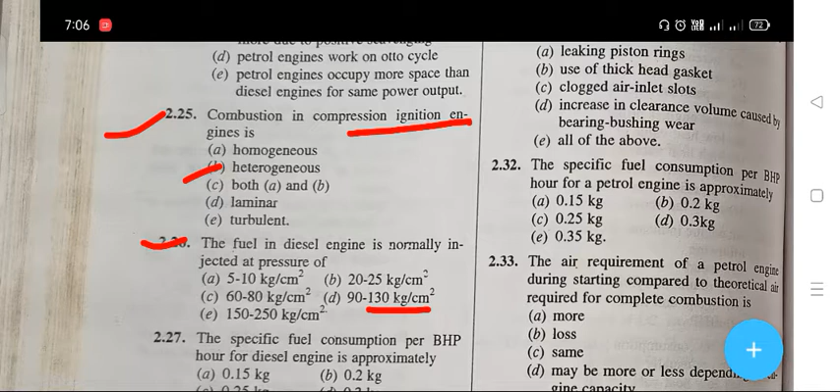Next question: the specific fuel consumption per bhp hour for diesel engine is approximately. The right answer is B, that is 0.2 kg.

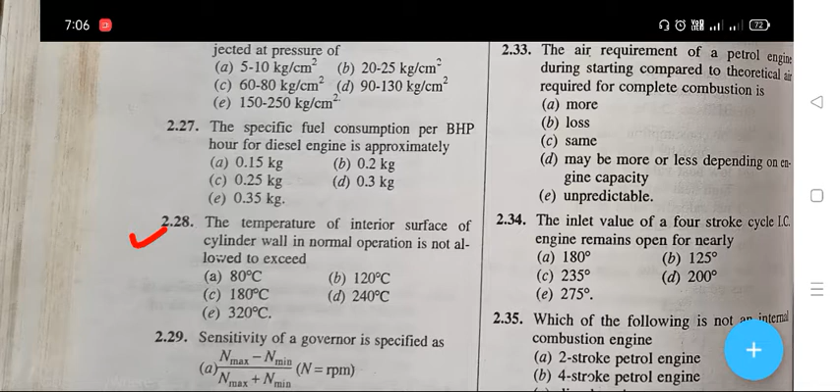Next question: the temperature of interior surface of cylinder wall in normal operation is not allowed to exceed. The right answer is C, 180 degrees Celsius.

Next question: sensitivity of a governor is specified as. The right answer is C, that is 200 into n max minus n min, upon n max plus n min.

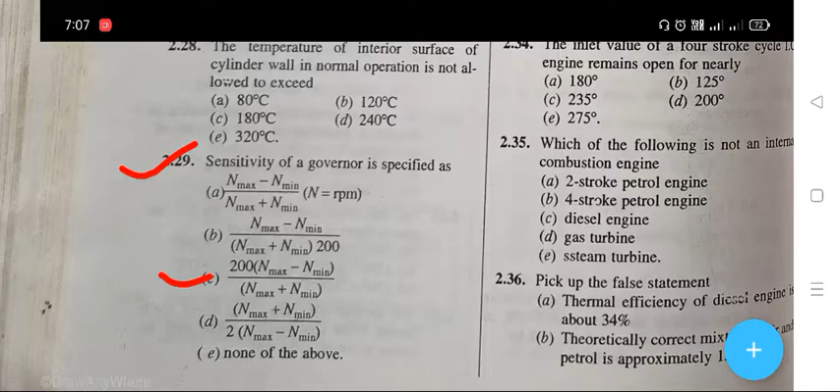Next question: crankcase explosion in IC engine usually occurs as. The right answer is the first option, a mild explosion followed by a big explosion.

Next question: compression loss in IC engine occurs due to. The right answer is E, all of the above. That means leaking piston rings, use of thick head gasket, clogged air inlet slots, and increase in clearance volume caused by bearing bushing wear.

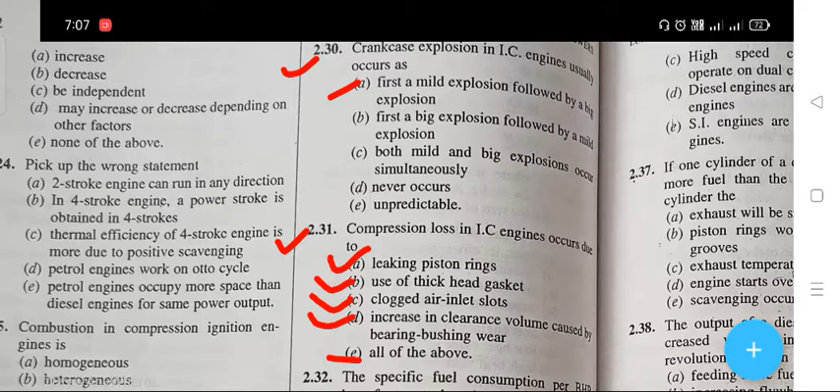The next question is that the specific fuel consumption per bhp hour for a petrol engine is approximately. The right answer is C, that is 0.25 kg.

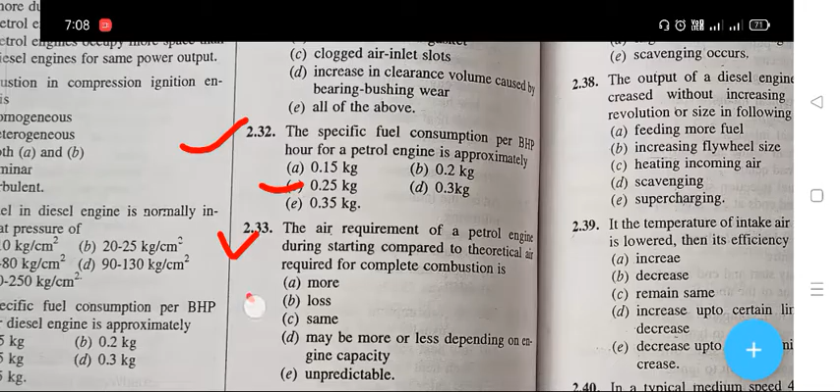The next question: the air requirement of a petrol engine during starting compared to the theoretical air required for complete combustion is. The right answer is B, that is less.

Next question: the inlet valve for a 4-stroke cycle IC engine remains open for nearly. The right answer is C, that is 235 degree.

Next question: which of the following is not an internal combustion engine? The right answer is E, that is steam turbine.

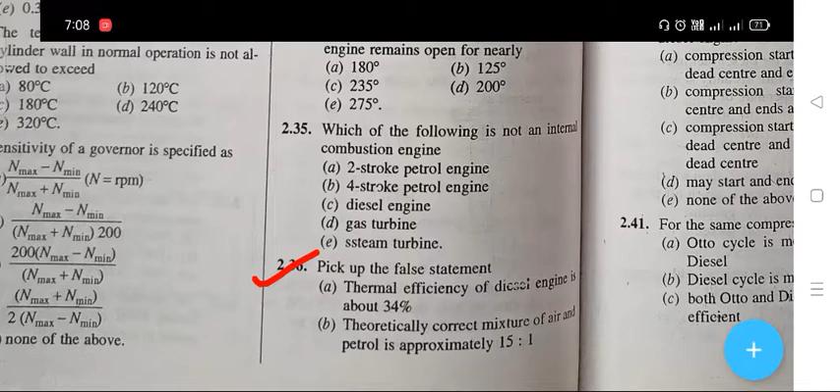The next question is, pick up the false statement. The right answer is E: SI engines are quality governed engines.

Next question: if one cylinder of a diesel engine receives more fuel than the others, then for that cylinder the right answer is E, that is scavenging occurs.

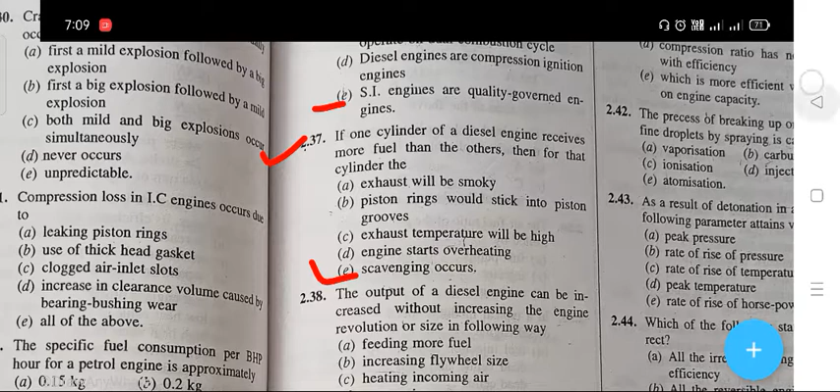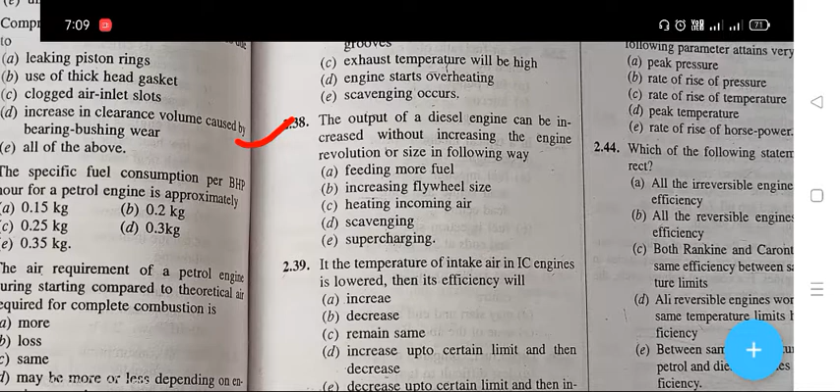Next question: the output of a diesel engine can be increased without increasing the engine revolution or size in the following way. The right answer is E, that is supercharging.

The next question is, if the temperature of intake air in IC engines is lowered, then its efficiency will be. The right answer is A, that is increase.

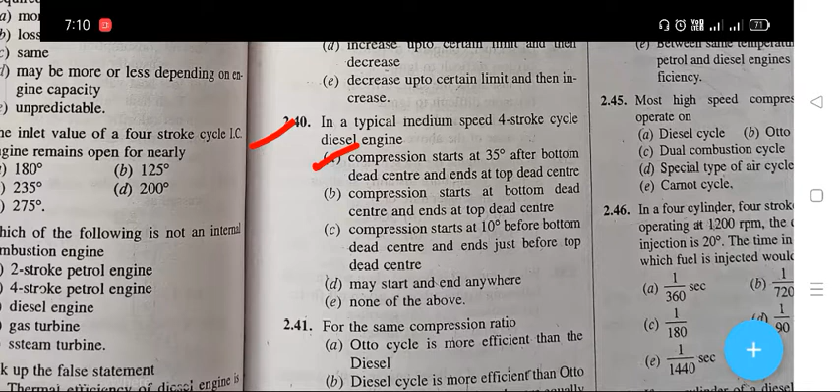Next question: in a typical medium speed 4-stroke cycle diesel engine, the right answer is A, compression starts at 35 degree after bottom dead center and ends at the top dead center.

Next question: for the same compression ratio, the right answer is A, that is the Otto cycle is more efficient than the diesel cycle.

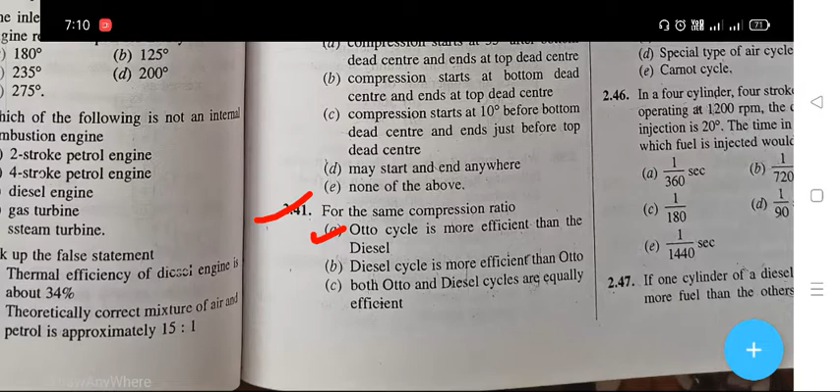The next question is that the process of breaking up a liquid into fine droplets by spraying is called. The right answer is E, that is atomization.

Next question: as a result of detonation in IC engines, the following parameter attains a very high value. The right answer is B, that is rate of rise of pressure.

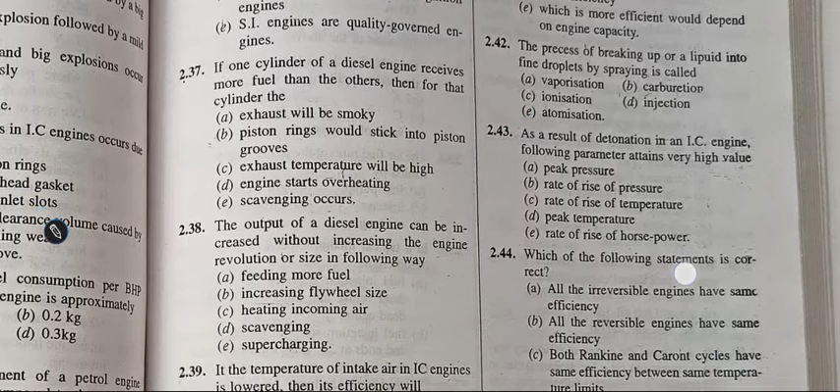Next question: which of the following statements is correct? The right answer is D: all reversible engines working between the same temperature limits have the same efficiency.

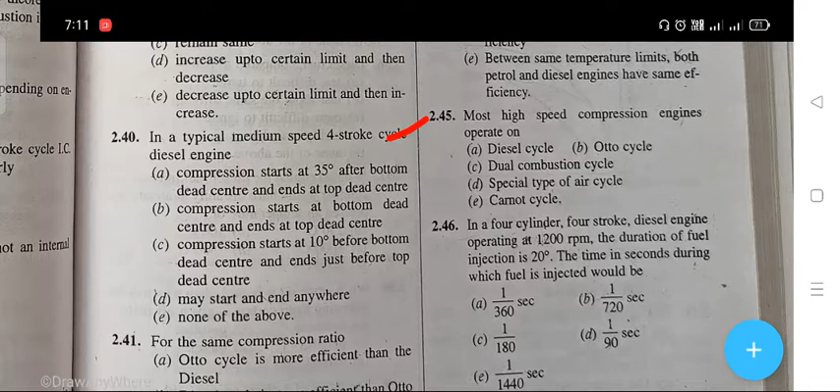Next question: most high speed compression engines operate on. The right answer is C, that is dual combustion cycle.

Next question: in a 4-cylinder 4-stroke diesel engine operating at 1200 rpm, the duration of fuel injection is 20 degree. The time in seconds during which fuel is injected would be. The right answer is A, 1/360 second.

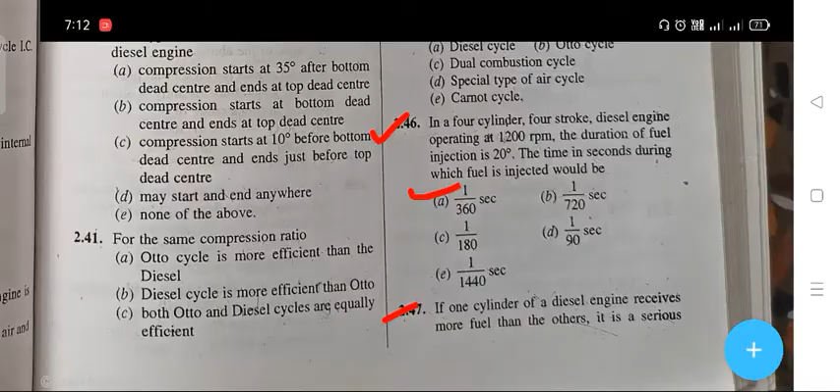Next question: if one cylinder of a diesel engine receives more fuel than the others, it is a serious condition for that cylinder which can be checked by. The right answer is D, that is checking cylinder exhaust temperature with a pyrometer.

Next question: the accumulation of carbon in a cylinder results in increase of. The right answer is D, that is effective compression ratio.

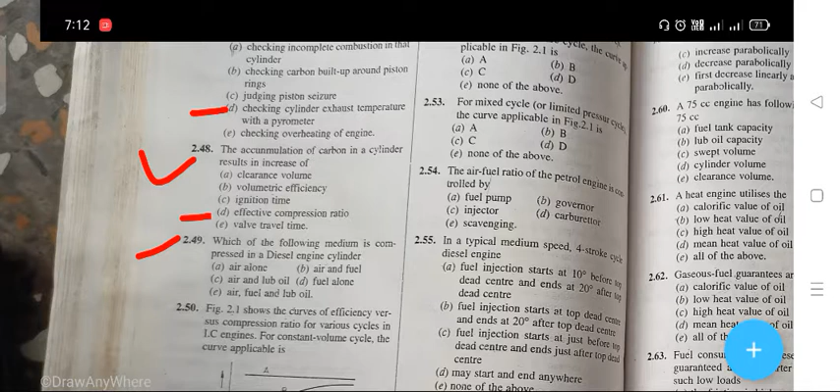Next question: which of the following medium is compressed in a diesel engine cylinder? The right answer is A, that is air alone.

The next question is, the figure shows curves A, B, C and D showing efficiency versus compression ratio of various cycles in IC engines. For the constant volume cycle, which curve is applicable? The right answer is B, that is capital B is the right answer. The curve shown is efficiency versus compression ratio for various cycles in IC engines, and for the constant volume cycle, the right answer is curve B.

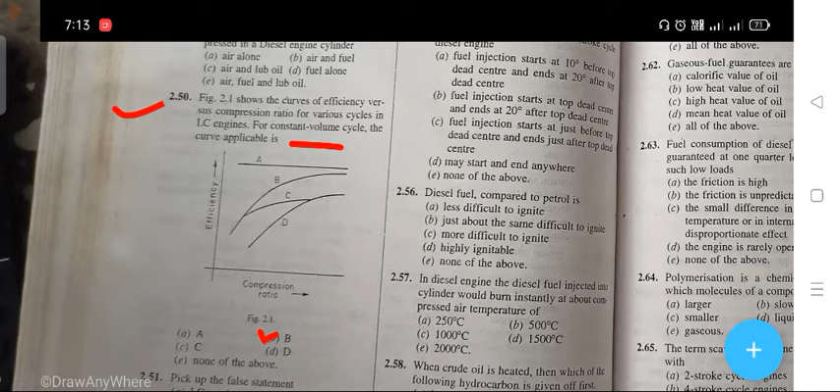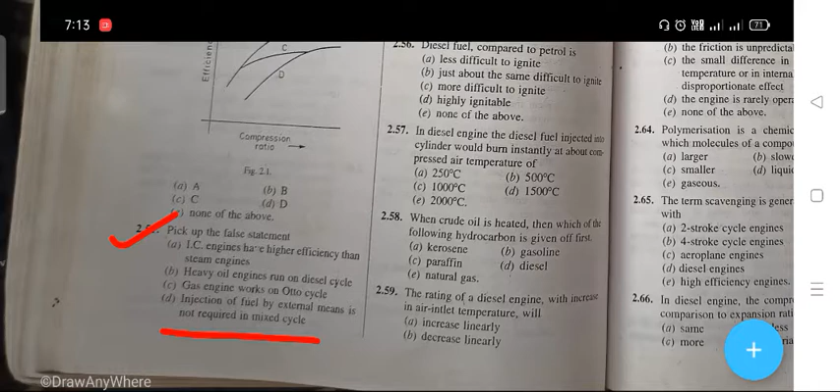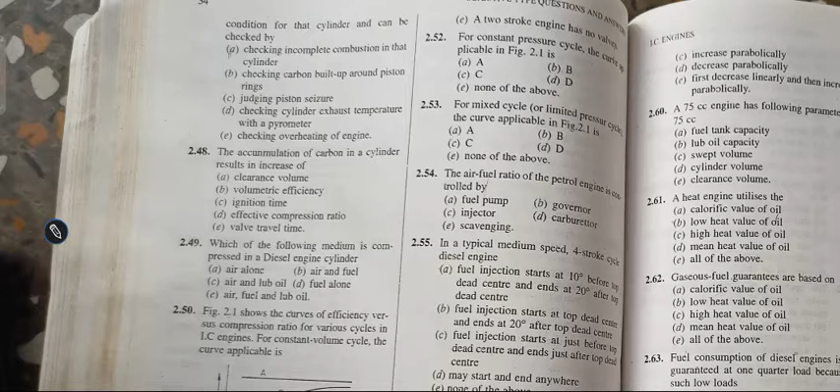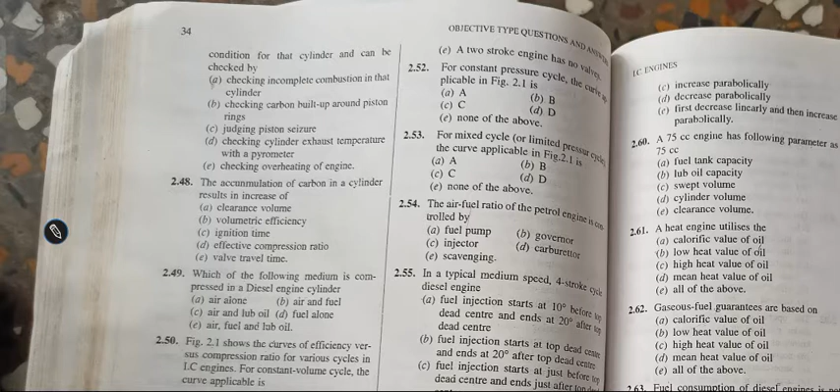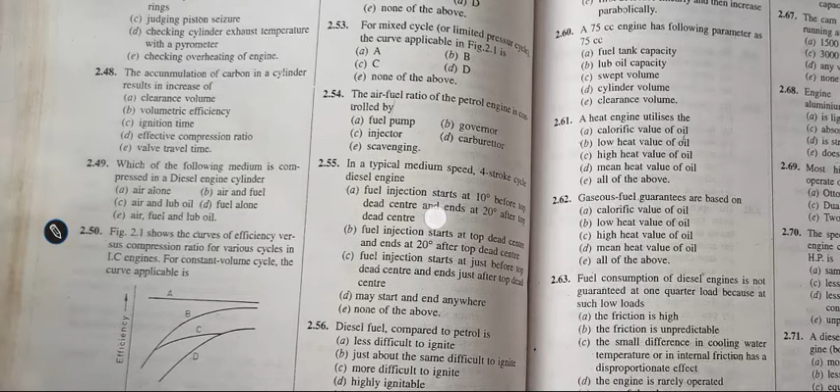Which curve is constant pressure cycle? D. Next question: for a mixed cycle, that is for limited pressure cycle, which curve is applicable? The right answer is C. So C is for mixed cycle, B is constant volume cycle, and D is constant pressure cycle as per the answers.

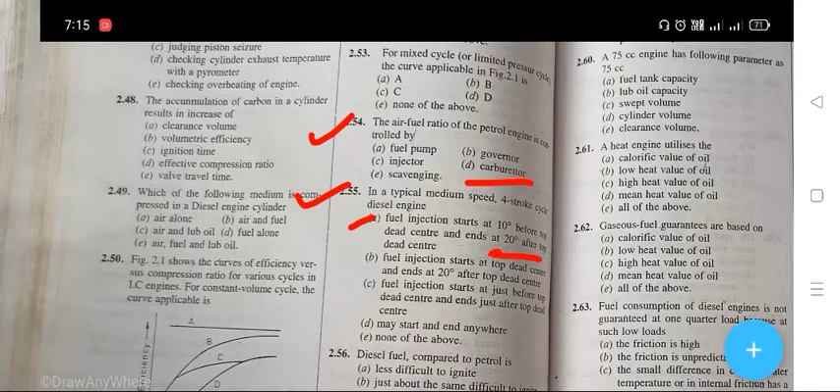Next question is, diesel fuel compared to petrol is, the right answer is C, that is more difficult to ignite.

Next question is, in a diesel engine, the diesel fuel injected into the cylinder would burn instantly at about what compressed air temperature? The right answer is C, that is 1000 degrees Celsius.

Next question, when the crude oil is heated, then which of the following hydrocarbons is given off first? The right answer is E, that is natural gas.

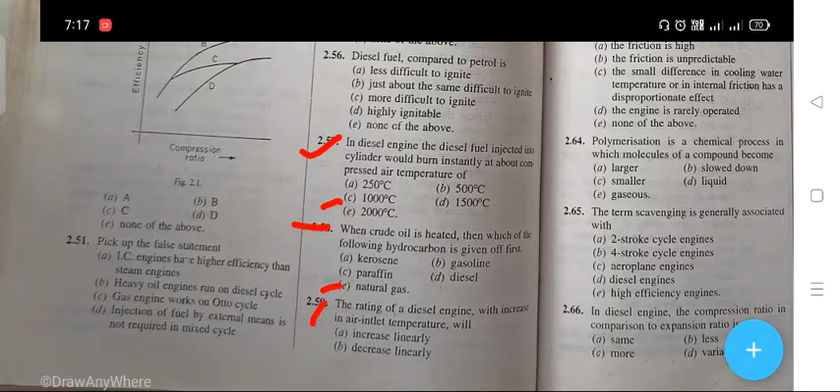Next question, the rating of a diesel engine with increase in air inlet temperature will be decrease linearly.

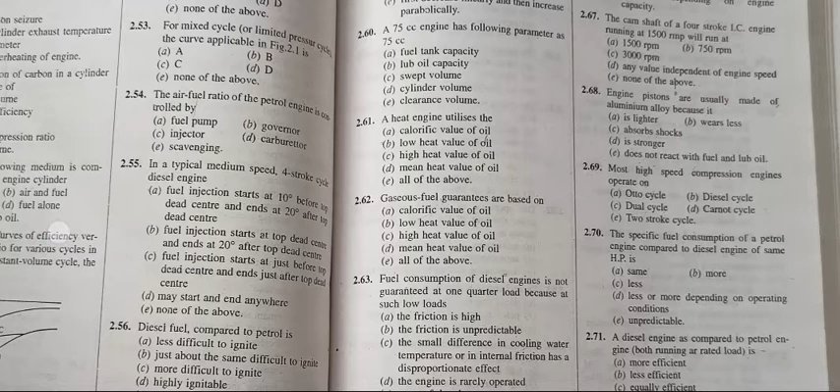Next question, a 75 cc engine has the following parameter: 75 cc, what is the right answer? It is C, that is your swept volume.

Next question, a heat engine utilizes the, right answer is C, that is high heat value of oil.

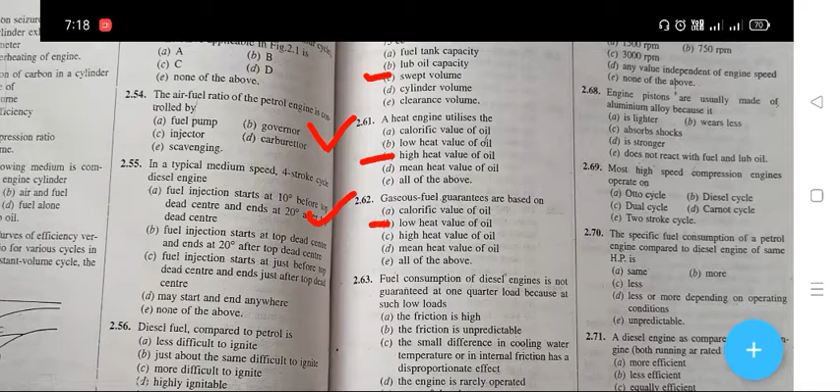Gaseous fuel guarantees are based on, the right answer is B, that is low heat value of oil.

Next question is, fuel consumption of diesel engine is not guaranteed at 1/4 load because at such low loads, the right answer is C, that is the small difference in cooling water temperature or internal friction has a disproportional effect.

Next question, polymerization is a chemical process in which molecules of a compound become A, that is larger. Polymerization is a chemical process in which molecules of a compound become larger.

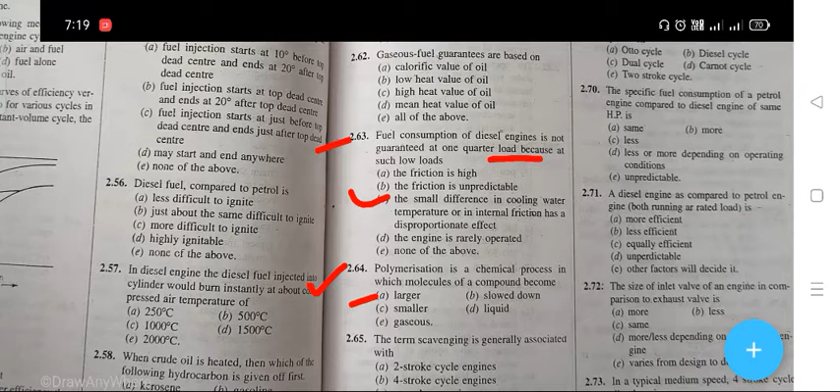Next question is, the term scavenging is generally associated with, right answer is E, high efficiency engines. And the next question is, in diesel engine the compression ratio to expansion ratio is C, more.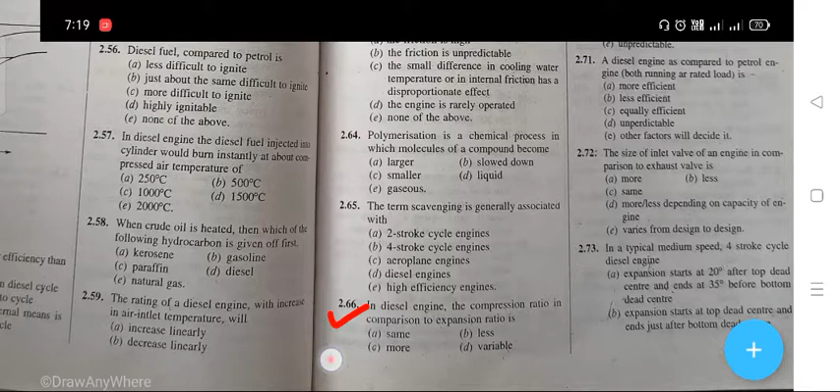The next question is, the camshaft of a 4-stroke IC engine running at 1500 rpm will run at, the right answer is B, that is 750 rpm.

Engine pistons are usually made up of aluminum alloy because it is A, lighter. Most high speed compression engines operate on, the right answer is C, that is dual cycle.

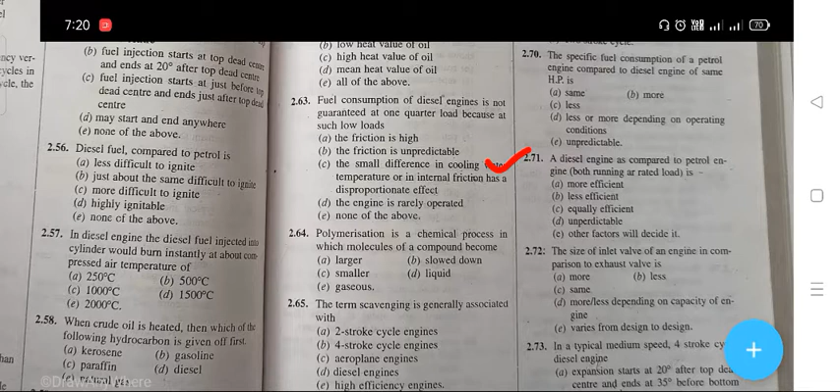The specific fuel consumption of a petrol engine compared to diesel engine of same HP is, right answer is B, more. The next question is, a diesel engine as compared to petrol engine, both running at rated load, is, right answer is A, that is more efficient.

Next question: the size of inlet valve compared to exhaust valve is B, that is less. In a typical medium speed 4-stroke cycle diesel engine, the answer is A: expansion starts at 20 degrees after top dead center and ends at 35 degrees before bottom dead center.

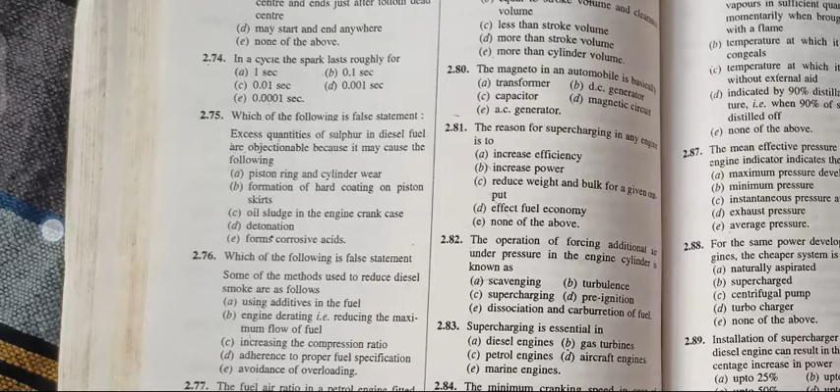Next question: in a cycle the spark lasts roughly for. The right answer is D, that is 0.001 second.

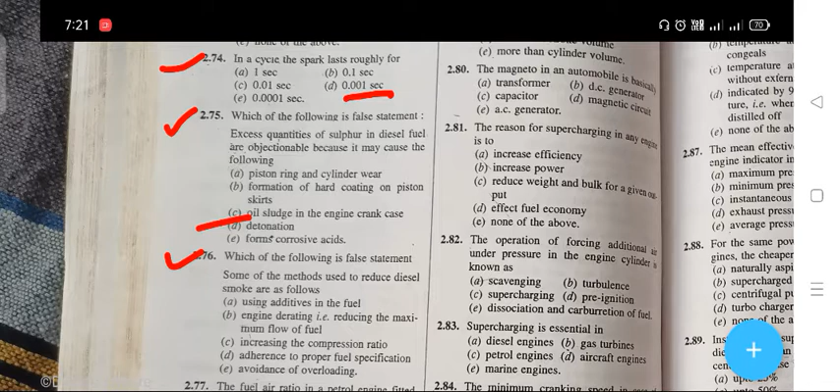Next question: which of the following is the false statement? The right answer is D, that is detonation. Next question: which of the following is the false statement? Right answer is C, that is increasing the compression ratio.

Next question: the fuel air ratio in a petrol engine fitted with a suction carburetor operating with a dirty air filter, as compared to a clean filter, will be. The right answer is A, that is higher.

Next question: pick up the wrong statement about supercharging. The right answer is D, supercharging results in fuel economy.

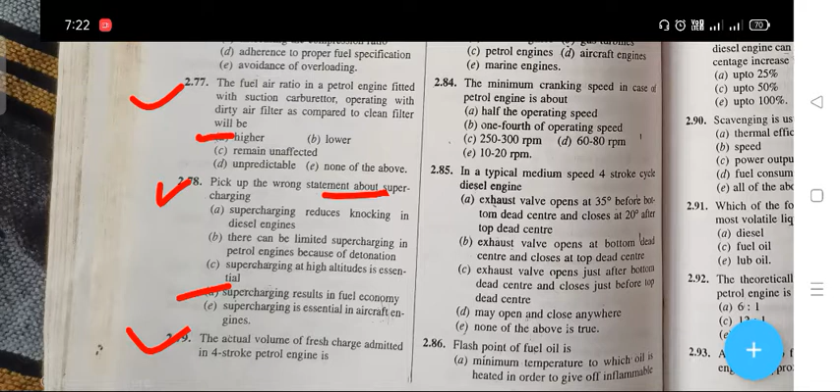Next question: the actual volume of fresh charge admitted in a 4-stroke engine is C, that is less than stroke volume. Next question: the magneto in an automobile is basically. The right answer is B, that is DC generator.

Next question: the reason for supercharging in any engine is to. The right answer is C, that is to reduce weight and bulk for a given output.

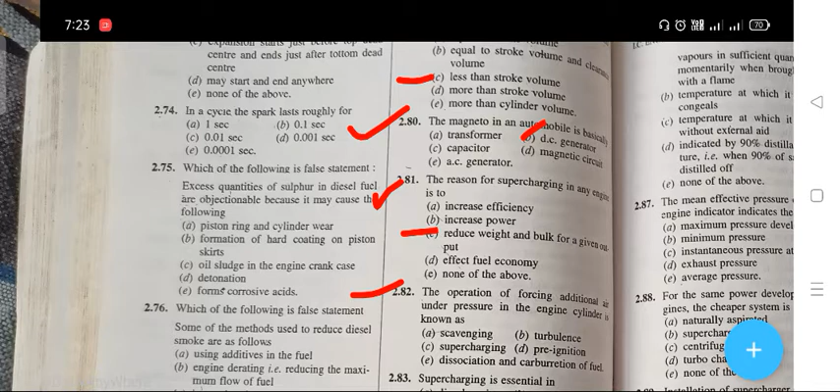Next question: the operation of forcing additional air under pressure into the engine cylinder is known as. Right answer is C, that is supercharging.

Next question: supercharging is essential in. Right answer is D, that is supercharging is essential for aircraft engines.

Next question: the minimum cranking speed in case of a petrol engine is about. Very important question. The minimum cranking speed in case of a petrol engine is 60 to 80 rpm.

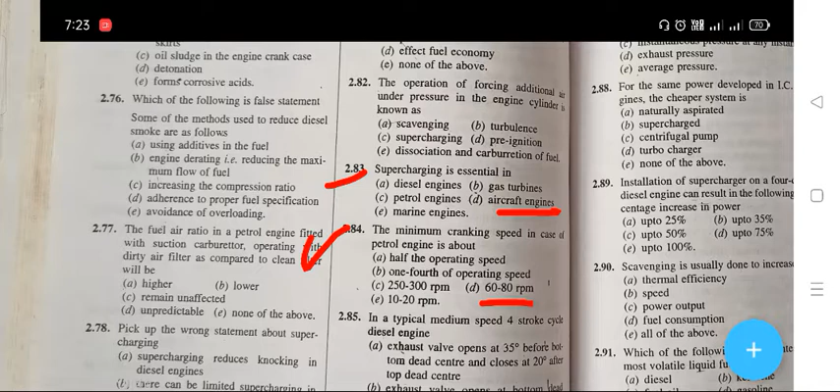Next question: in a typical medium speed 4-stroke cycle diesel engine. Right answer is A, that is the exhaust valve opens at 35 degrees before bottom dead center and closes at 20 degrees after top dead center.

Flash point of a fuel oil is. The right answer is A, that is the minimum temperature to which oil is heated in order to give off inflammable vapors in sufficient quantity to ignite momentarily when brought in contact with a flame.

Next question: the mean effective pressure obtained from the engine indicator indicates the. The right answer is E, that is average pressure.

Next question: for the same power developed in IC engines, the cheaper system is. The cheaper system is B, that is supercharge.

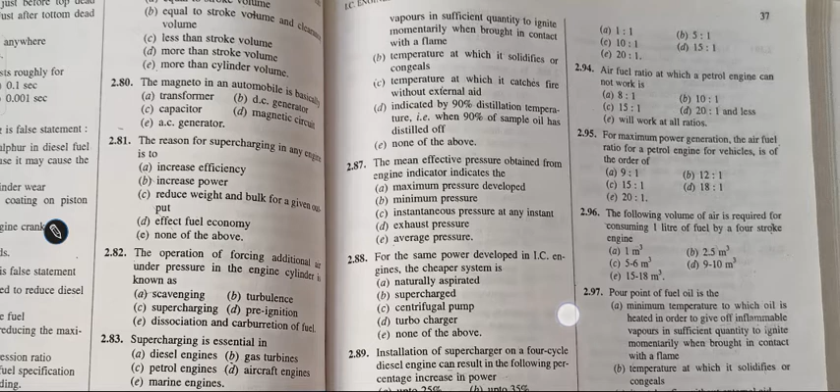Next question: installation of a supercharger on a 4-cycle diesel engine can result in the following percentage increase in power. The right answer is E, that is up to 100%.

Next question: scavenging is usually done to increase the. Right answer is C, that is power output.

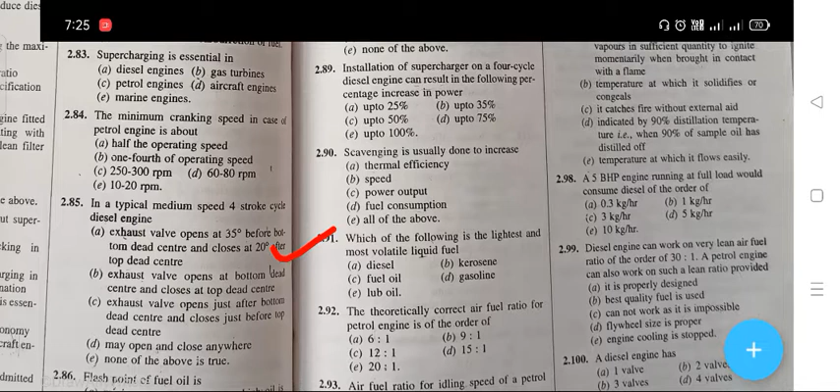Next question: which of the following is the lightest and most volatile liquid fuel? The right answer is D, that is gasoline.

Next question: the theoretically correct air fuel ratio for a petrol engine is of the order of. The right answer is D, that is 15:1.

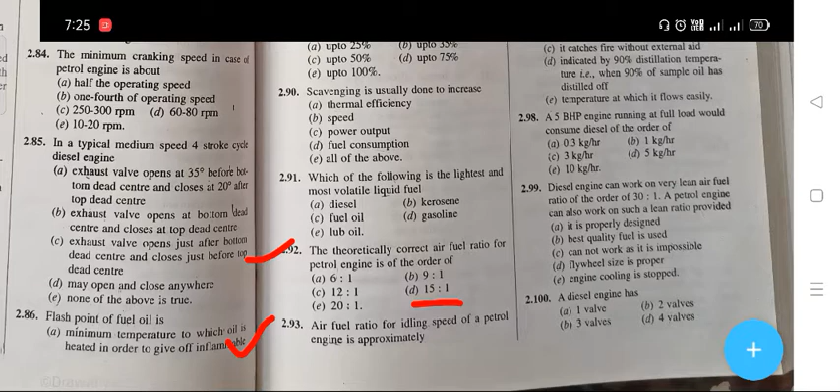Next question: air fuel ratio for idling speed of a petrol engine is approximately. Right answer is C, that is 10:1. Next question: air fuel ratio at which a petrol engine cannot work. The right answer is D, that is 20:1 and less.

Next question: for maximum power generation, the air fuel ratio for petrol engines in vehicles is of the order. Right answer is B, that is 12:1.

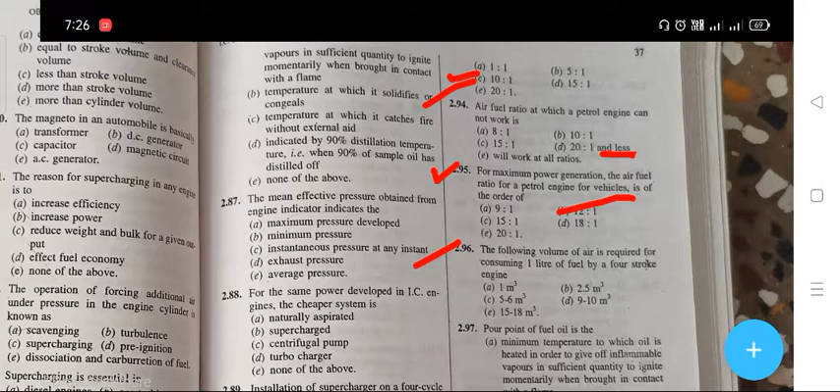Next question: the following volume of air is required for consuming 1 liter of fuel by a 4-stroke engine. The right answer is D, that is 9 to 10 meter cube.

Next question: pour point of fuel oil is. The right answer is B, that is the temperature at which it solidifies or congeals. Next question: a 5 bhp engine running at full load would consume diesel of the order of. The right answer is B, that is 1 kg per hour.

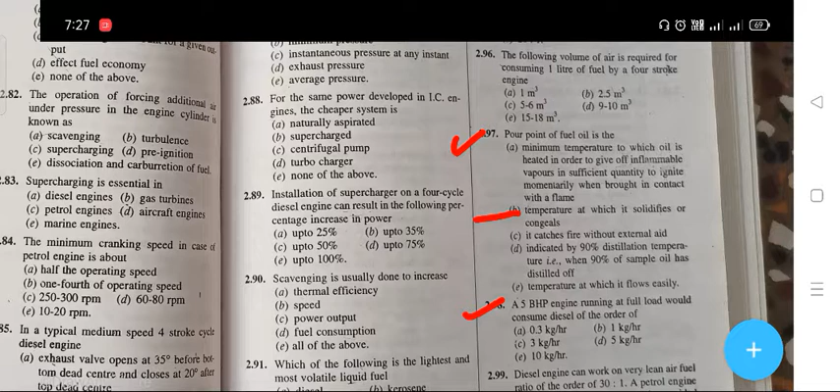And the next question is: a diesel engine can work on a very lean air fuel ratio of the order of 30:1. A petrol engine can also work on such a lean ratio provided what? Right answer is C, that is it cannot work as it is impossible.